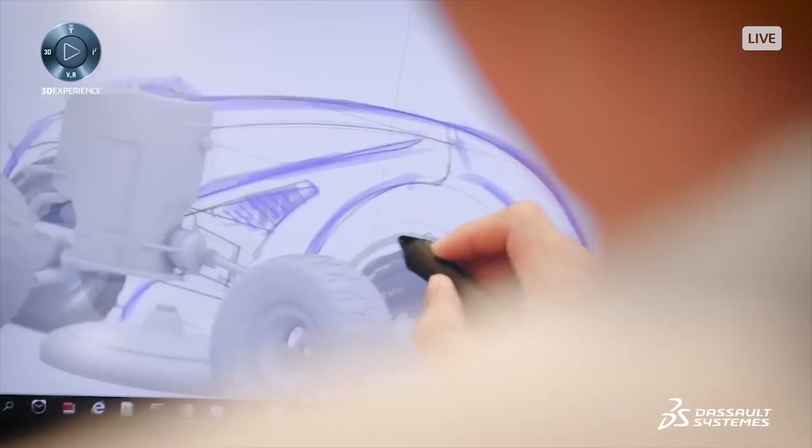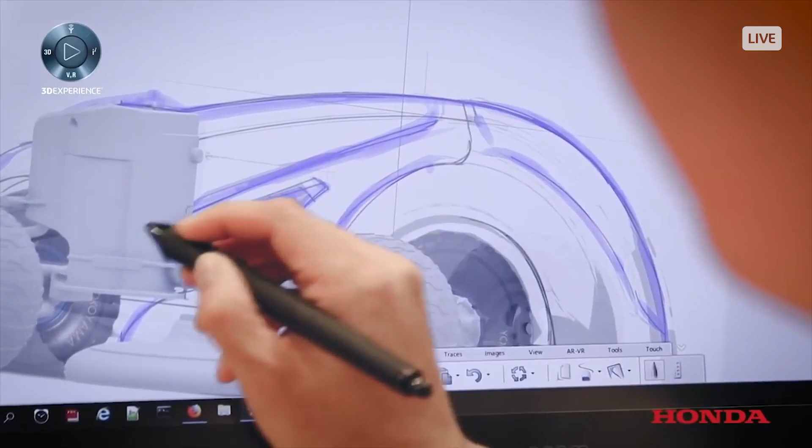It started as a design study to imagine a lawnmower of the future. Usually, I start drawing a two-dimensional sketch, and then I import it into CATIA using Sketch Tracer. If the shape is organic, I use Imagine and Shape and make it a solid with part design. That is my usual workflow. Modelers, designers, testers, and many others are able to collaborate on a common design through the use of the 3DEXPERIENCE. I think that is a major benefit of the platform.

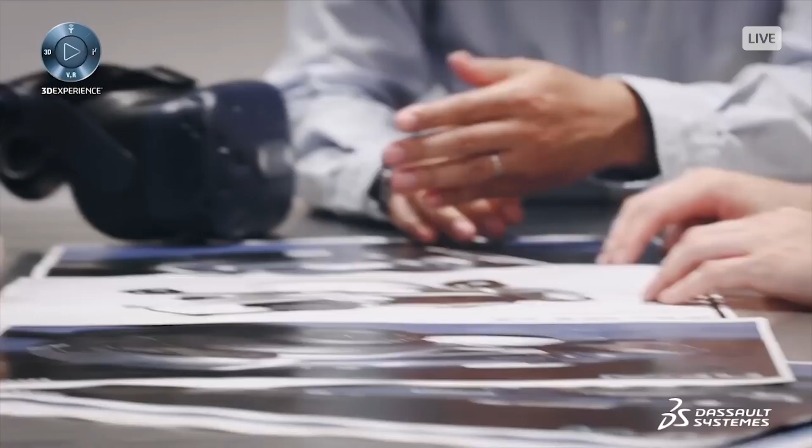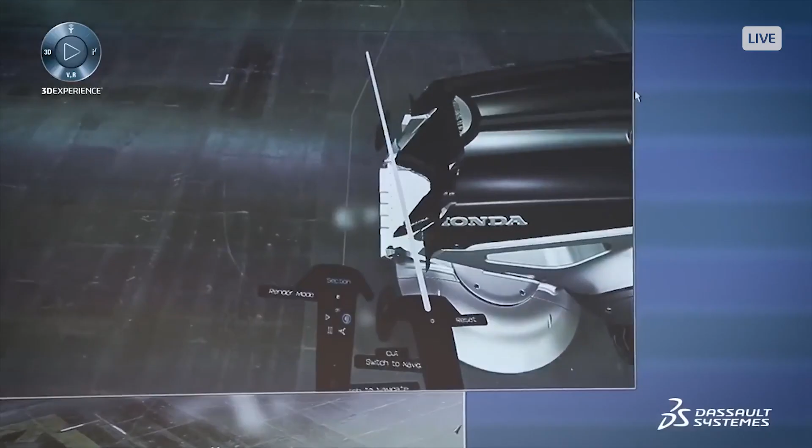By sharing a common 3D model, designers can express their diversity in design, whether it is a reflection of their distinctiveness experience or technical level. We can look at the same design using different perspectives, with a new personality or perspective added to it, and we can see the impact of changes to the design working on the same platform. I think that adds to a broader scope of design.

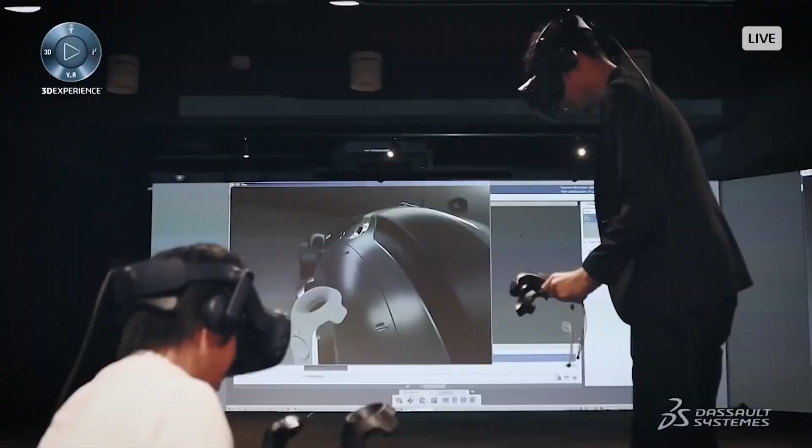As a digital modeler, it is my role to understand the design intent and what the designer wants to express through his sketch. I can check a model right away with a designer using virtual reality. Sometimes it's to check if everything will fit into the given space, or to check if the size is accurate. We may also ask engineers to join us to examine how easy it is to maintain the products, for example. The 3D Experience platform is very useful for us.

Impressive story, Martin. Yes. So can you tell us what's new in 19X then? Of course. So in our 19X portfolio, the biggest news that we're very proud of are, of course, the release of our two new roles. One is called the Visual Experience Content Collection, and the second new role is the Product Experience Presenter, which is a design decision role for collaborating in teams.

Okay. And then, of course, we see evolutions on the existing roles in our portfolio when we look at Visual Experience Designer with live rendering as the main app. Again, here we have focused on the three main pillars for improvements, which is user experience, which is new rendering features, rendering consistency across our render modes, and also increases in performance. Excellent. So let's see that in action in details.

Let's go. As mentioned before, the biggest news in our CATIA Design product experience portfolio for the 2019X release is the full general availability of our new roles, the Product Experience Presenter and the Visual Experience Content Collection.

With general availability, those two roles are now accessible like all other roles from Dassault Systèmes for the 3DEXPERIENCE platform. That includes full availability on-premise and on cloud, and they can also be ordered for evaluation. So let's have a look at what those two roles are about.

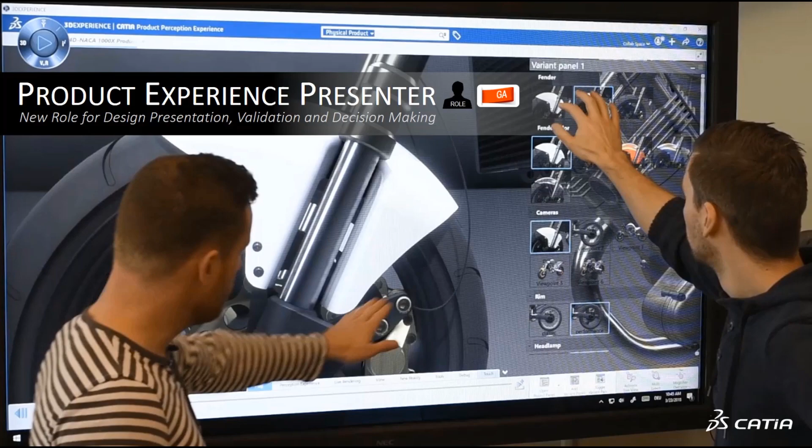The Product Experience Presenter is dedicated to easy and intuitive visual design reviews. The role, with its main application called Product Perception Experience, is targeting three main user groups: creative designers, who want to explore different design ideas and combine multiple selections of materials and shape options and see those in context or in side-by-side comparison. Then we serve design teams as a community who want to discuss the different ideas as a group inside their own team, as well as together with other teams and stakeholders, then capture the decisions and in this way prepare management reviews.

Finally, the third kind of user we target is a design manager. The manager wants to review and compare the proposals of the teams, but is not typically an expert user of one particular software, let alone of all the different tools which are used daily to create the inputs. He or she wants an accessible and intuitive way to understand a complex product or challenge quickly and then make informed and solid decisions.

Besides the availability, we have evolved the user experience of the role to provide smoother workflows. For example, it is now more intuitive to define packages of different variants for review. There's also a new way of interacting with the variants during a presentation. Besides the established user experience of clicking on one of the thumbnails to switch a variant, a user can now also set up triggers for interaction. The triggers will then switch a certain set of variants on activation directly on the 3D geometry.

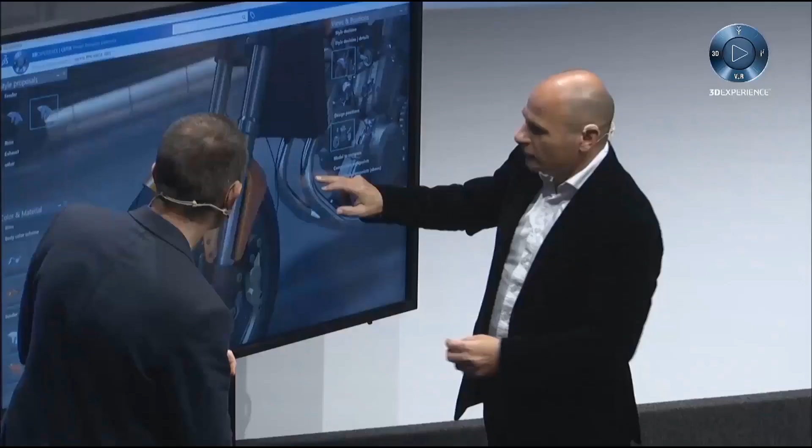If you can move to the next viewpoint, because even if this blue material looks nice for a sport version, we thought that it might be also nice to have another color for the body. I will also change it on the fender. So this orange is... You change it on the fender? Here? Oh, okay. Yes. And you did put a car paint, right? Yes, it's a car paint. All right. Looks good.

So, all right. If you are happy with this one, maybe you would like to compare it to the existing urban version? You wanted to do a design change also or not? No, it's okay. After that. Okay. So let's compare. So if you can open the model to compare, activate, yes. Hold on, it's coming, it's on its way.

So we are comparing here two motorbikes. We will compare the urban one. You see the previous urban version. Okay. You have the comparison viewpoint as well. Here? Yes, so if you can activate the first one, because what I did, I also created a turntable for both of them, and I will just activate the turntable right now. Okay. For you to have a look.

Yeah, to do some design comparison is very important. Designers, they like to express new ideas, but they always want to compare between two versions or from an existing product to another one. By the way, the turntables are always in real time, so I can navigate while I'm doing the turntable, right? Yes, yes. And we can also, again, change the design alternatives we just showed before, if you like.

Can you change the exhaust, or? So no, you wanted to change the front light? We can change the exhaust again and have a simple one. We can change again to have the same body color, and so on. But yes, Fabio, our designer, has been working on a new headlamp. Because you see, the headlamp is still the classic one, kind of retro look for the sport one. So Fabio has been working on a more sport kind of headlamp.

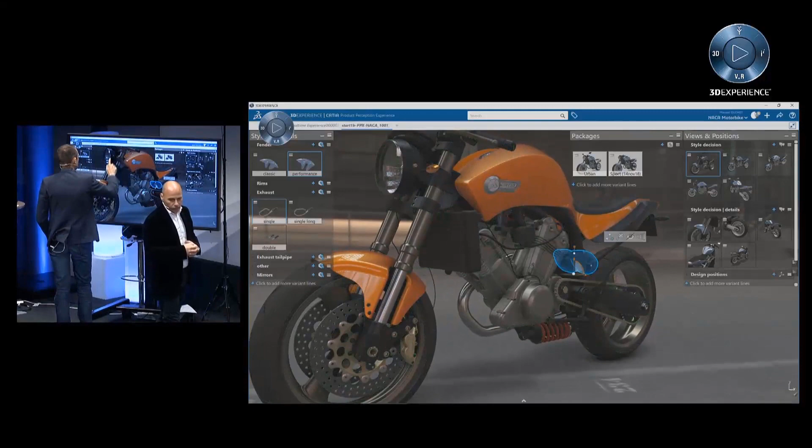Now he wants to add new lines or new variants, so he deactivated the play mode to go to authoring mode, and now it's loading new 3D elements, searching in the 3DEXPERIENCE platform for new 3D data. And then he will put them in position, or save them into a different variant thumbnail.

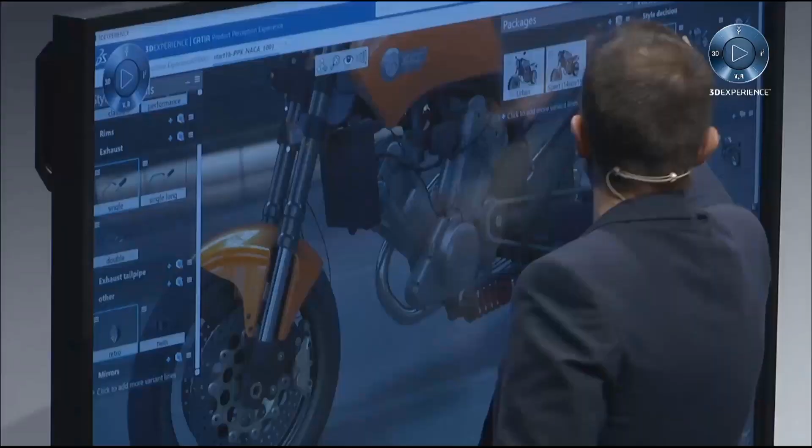So at the end, when we finished the presentation, we said, okay, let's see this motorbike, the sport version, with all these combinations of variants. So with this headlight, with this color, with this exhaust, and we can save that as a package. So by combining all the variants together, we create one package. So if we are happy with this version, you just push the plus button, and now it will create a kind of a shot, a variant. It's creating it, I think. Of all the combined variants.

Now we've seen how to use the product perception experience on a touchscreen. Let's see how the app fits into our VR experience roadmap. Building on top of the VR experiences, which we started to offer with the 2017x release, including collaborative review functions and different interaction modes in VR, we can now, with the 2019x release of the 3DEXPERIENCE platform, also use the product perception experience in VR with a head-mounted display like HTC Vive or Vive Pro.

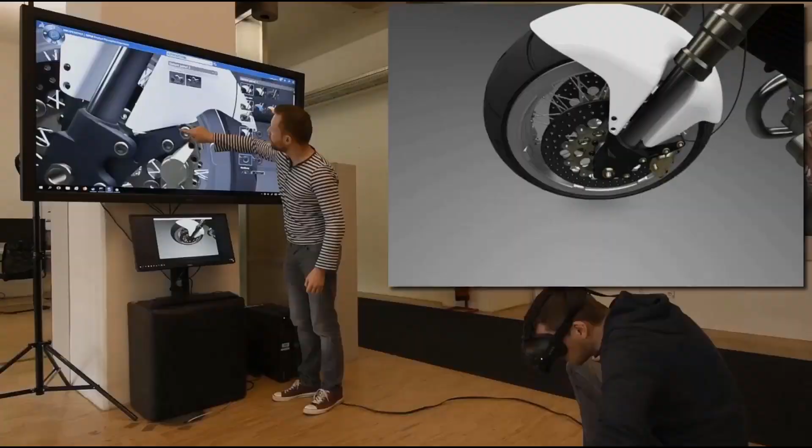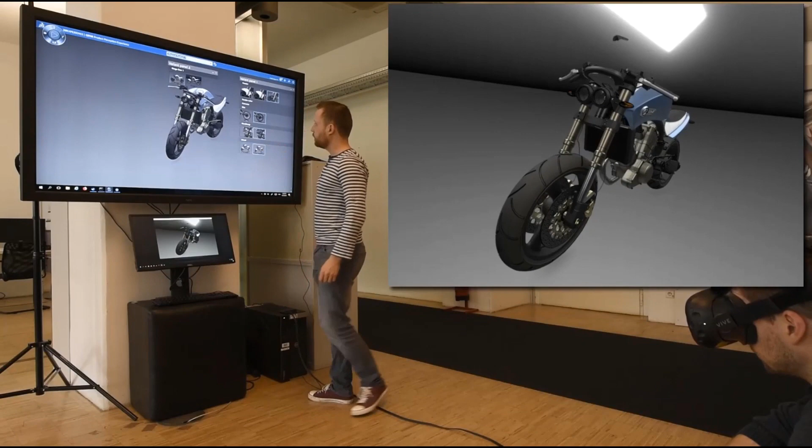We see here one possible combination of the capabilities as shown before. A review of features on a big touchscreen, including a session where one of the designers puts on a headset and can experience the data fully immersed in life-size stereo 3D. Any switches and animations triggered on the touchscreen are visible in real time to the VR user. Like this, a decision maker can fully focus on investigating the subject matter while he delegates variant switching to his colleague.

In combination with the new trigger functionality, since FD01 of the 2019X release, even the VR user has full control over the variant switching. Let's first check how to set up a trigger. In our example, I need to select an object in my 3D experience, and I define that object to become a trigger for a specific set of variants. As shown here, this can be, for instance, an open-close mechanism. Once I've set up the trigger, I can now, just by clicking directly on the object, activate the variant.

The trigger works exactly the same in VR. I point at my object, click with the controller, and the variant is activated. Of course, this works for all variant types in the application. In the previous example, we saw how to activate a door animation. Here, I point at my product with a pick ray, and by clicking on different parts, I can change their color and finish. This allows me full control over the appearance of my virtual design, while I move around it fully intuitively to explore different options from every angle.

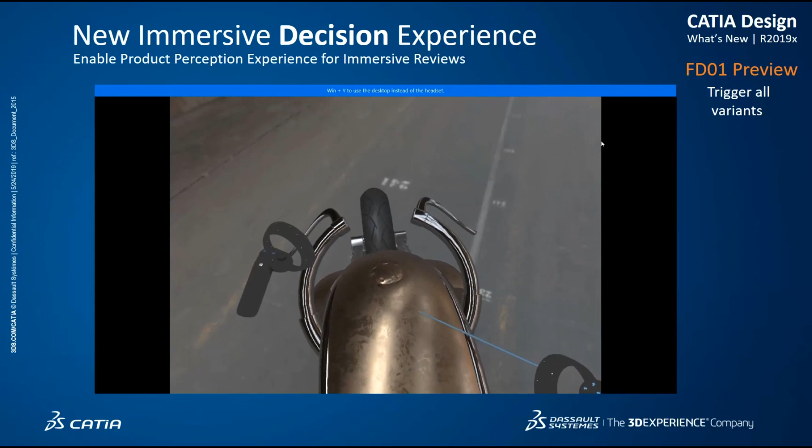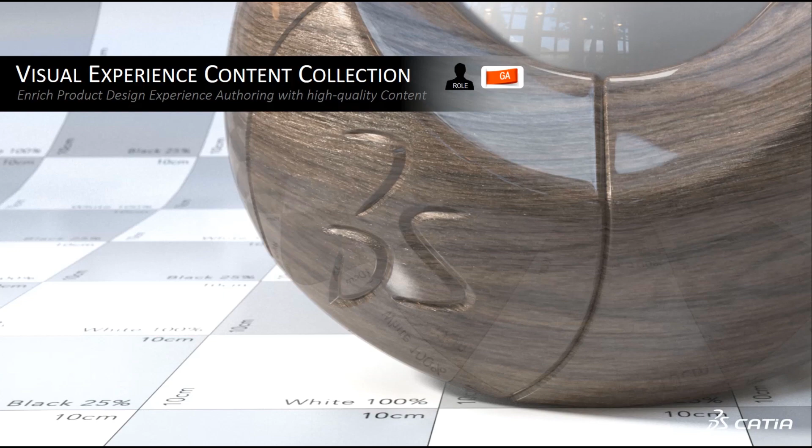Let's now look at the second new role in our product experience portfolio, which is called the Visual Experience Content Collection. This role is a selection of enabling content to accelerate your visualization workflows. Our goal is to make visualization easy and accessible for everyone, to allow to leverage the full capabilities of our integrated rendering technology. We aim to speed up the creative process and boost visual quality to the highest level.

The easiest way to illustrate what the role offers is in pictures. We see here a typical CATIA CAD model. With the Visual Experience Content Collection, without any expert knowledge on how to create textures or realistic materials, you can go from this view to this result in as little as 1 hour preparation time. Every bit of content which makes the motorcycle look that realistic was taken out of the box of our content collection and applied to the scene within 1 hour. From the realistic materials and textures up to the lighting and background in high-res HDR.

The Visual Experience Content Collection is available as an extension of our CATIA Design roles, which all feature CATIA Live Rendering. Those are in detail the concept building designer, creative designer, product industrial designer, transportation designer, visual experience designer, aero surface modeler, and Class A modeler. The contained items are designed to serve a multitude of industries such as automotive, aerospace, marine and offshore, high-tech, and so on. Every material and content item was chosen to maximize leverage for all those industries.

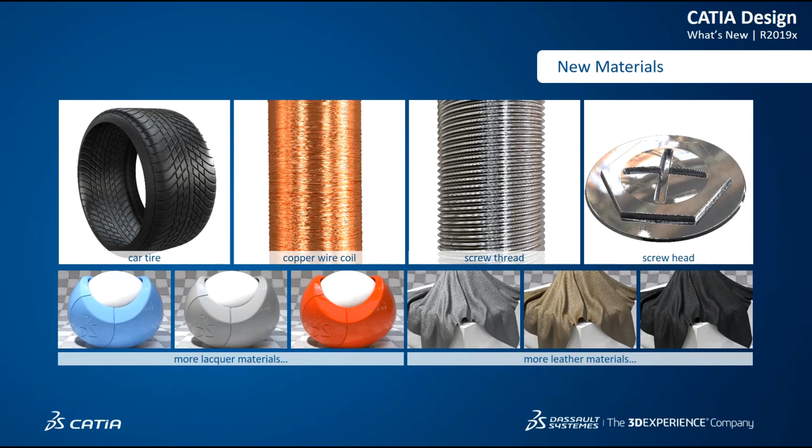Here we see a few examples of the resolution and detail of the materials provided with the content collection. All of those materials are procedural, which means they allow full user control over their appearance. You can adjust attributes like color, glossiness, grain, depth, or aging, just to name a few. For quick ideation in design and engineering, the procedural materials also contain examples like different patterns of car tires, wire, or screw thread.

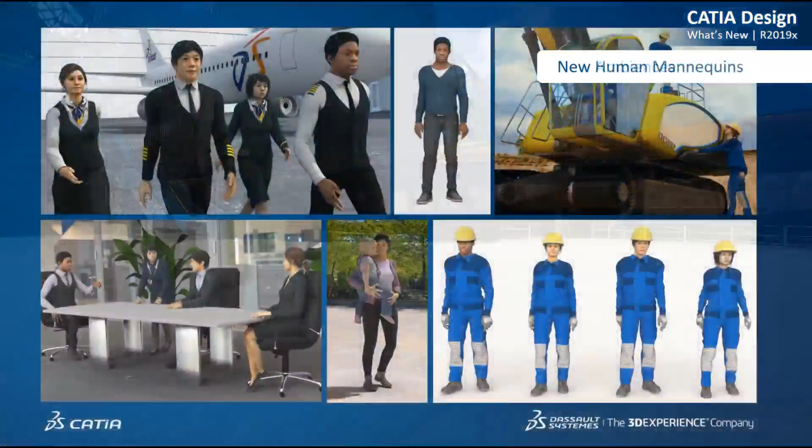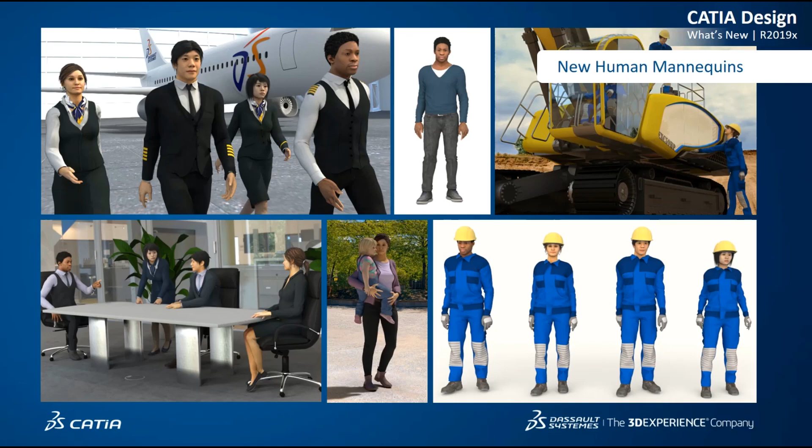The ambiances cover a wide range of scenarios like retail, nature, construction, indoor, outdoor, day and night. Each one comes with high dynamic range lighting and in very high resolution. Our human mannequins now come in different outfits to fit multiple industries and scenarios. They can be dressed up as businessmen and women, flight crews, or construction workers. On top of the different work outfits, various pieces of clothing can be switched in color and appearance. Whenever a more abstract representation of human proportions is desired, the mannequins can also be loaded with plain materials in different versions.

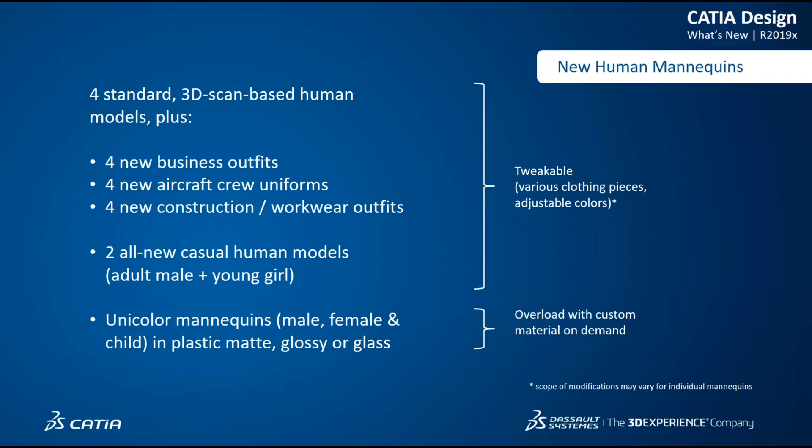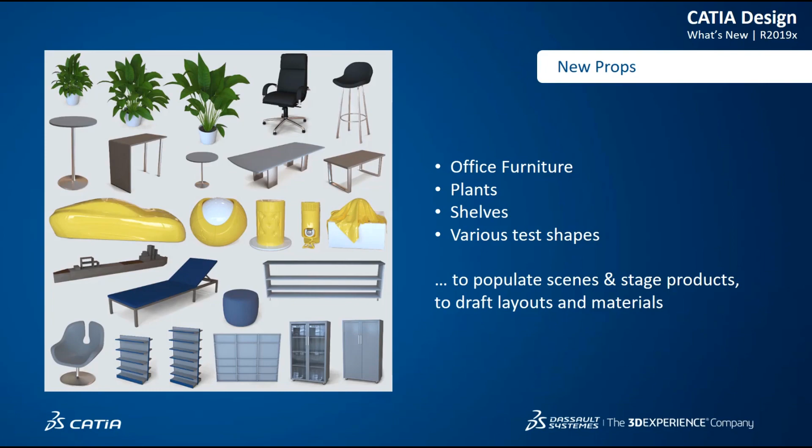The props are intended to give context and relative sizes and proportions, as well as to help illustrate layouts and user scenarios. They can be used like any other 3D object inside the 3DEXPERIENCE applications. So much for the brand new roles. Let's now look at the updates in the existing ones.

We start with the Visual Experience Designer and CATIA Live Rendering. With the 2019x release, we have migrated our rendering to a new material model which is called Enterprise PBR. For our global illumination rendering with Stellar and Iray, we now offer a denoiser. It's based on artificial intelligence and helps accelerate your render results drastically.

For better user experience, we have improved the workflows for creating and applying materials, editing UVs, and lighting. The camera model was reworked, and other new graphic features have been added as well. Diving deeper into the first of the 3 big initiatives on CATIA Live Rendering, which is visual excellence.

The previously mentioned Enterprise PBR is based on existing GGX BRDF models. The main goal during its development was to hit the sweet spot between expressiveness and performance, as well as offer visual consistency throughout the different render modes which we offer on the 3D Experience platform. It's been designed to act as the backbone of all our rendering and to consume all sorts of inputs, such as measured, scripted, or procedural materials.

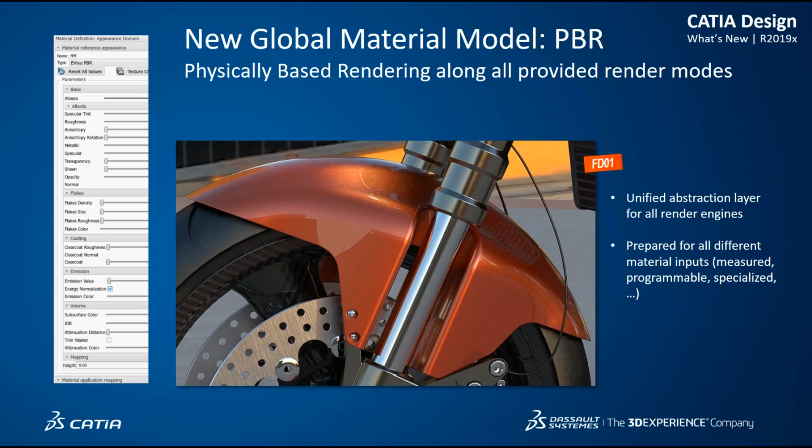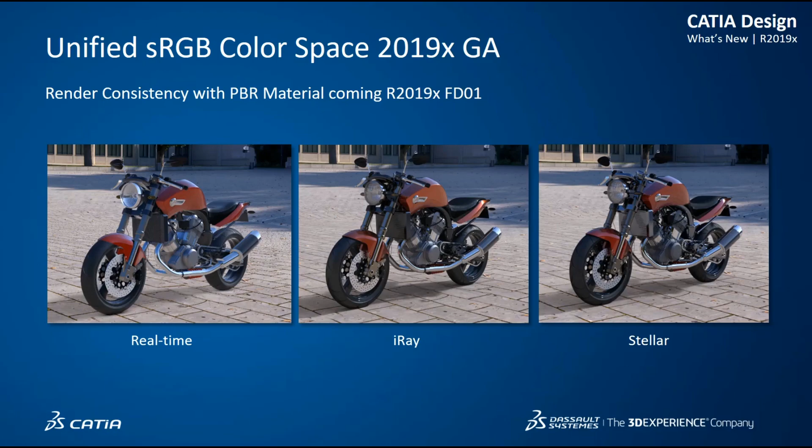The Enterprise PBR material is a render-agnostic material model which can be integrated into any rendering engine, and it's also documented and published as open source on GitHub. Together with a consistent material description, the complete render pipeline on the 3D Experience has been unified on the sRGB color space to consistently process inputs and outputs.

Also new is the handling of colors in accordance with international paint and coating standards. No matter what information on a color you might have, be it the CMYK representation, sRGB, a hex value, or RAL number, your color inputs will always be displayed and rendered consistently and accurately. The second big initiative on CATIA Live Rendering targets performance.

At the time of the release of the 3D Experience Platform 2019x, the latest hardware generation from NVIDIA, GV100, had been implemented. Development on RTX support has carried on in the meantime, and today we see an even bigger performance gain by the use of NVIDIA's latest RTX hardware. Independently of the GPU hardware used, we have also accelerated the real-time reactivity while working with the 3D Experience by optimizing memory usage and using instancing for materials.

The ray tracing with Stellar initializes much faster than before, and we have implemented a mixed rendering mode which falls back into real-time visualization whenever the user interacts with the scene, and continues to render in global illumination as soon as the scene is resting again. The artificial intelligence-based denoising technology allows much faster convergence of the final image.

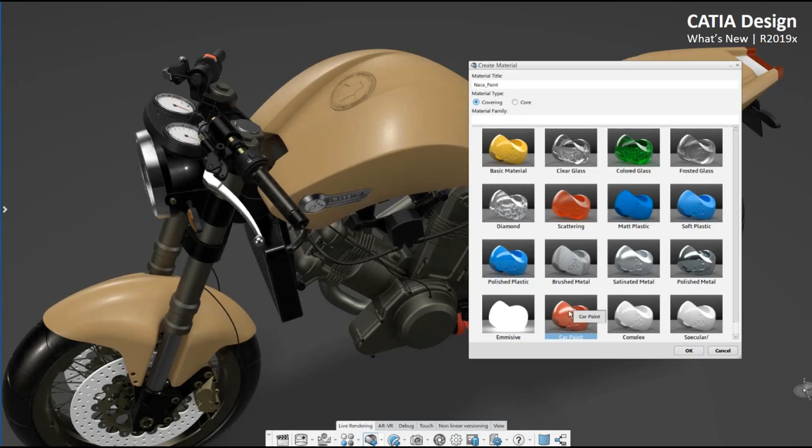Last but not least, we have improved several workflows for our users in CATIA Live Rendering. With R2019x, we're introducing a new command for creating visual materials, as seen here in the panel. To illustrate it in a video, it's very simple to start the creation. The new panel suggests template materials sorted in categories.

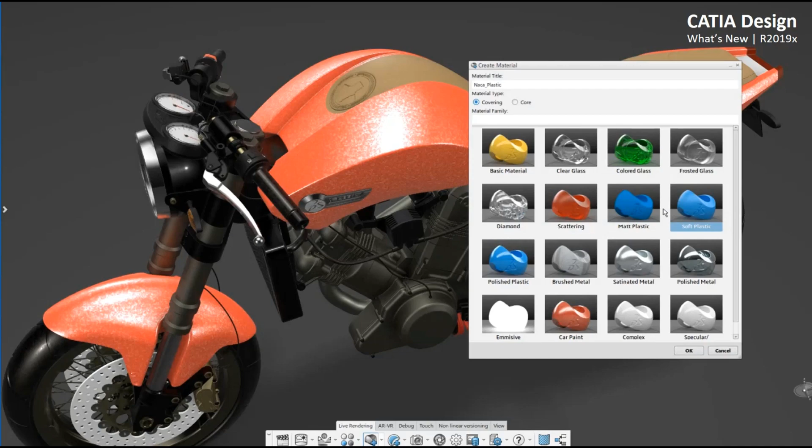The user can enter a name, select one of the templates, and immediately start applying it to the geometry. This makes the new user experience much more visual, user-friendly, and accessible. Once created, the materials can of course be changed and tweaked as usual. To find an existing material much more efficiently, the old material search browser has been replaced by a new material palette. The new palette offers sorting and filtering by multiple criteria such as material type, author, or even by keywords.

To apply materials consistently to your model, CATIA Live Rendering now offers a new command for UV unwrapping. The command itself is reused from the Generative Shape Development application and becomes accessible in Live Rendering if you have one of the following roles installed: Transportation Designer, Product Industrial Designer, or Class A Modeler.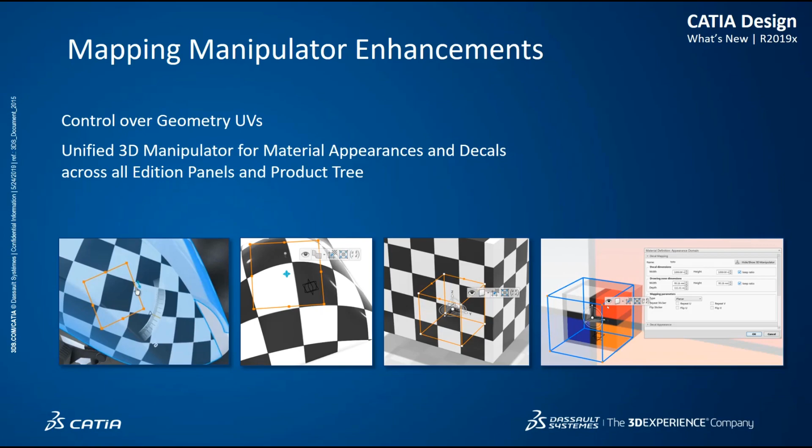When working with ambiances to add lighting and context to your product, the user experience has been unified between the different data types of ambiances. Tooltips and new panels provide further guidance on the new features.

That concludes the highlights on the visualization solutions in our portfolio. Now let's have a closer look at what's new in our immersive VR solutions.

As a quick recap, we have a roadmap for our portfolio to integrate our offerings and offer the most value of our combined functions and visual quality. We will now have a closer look at new functionalities in the immersive visual experience and the immersive collaboration experience. We start with immersive visual experience, which is our enabler role for single-user VR experiences on the 3D Experience platform.

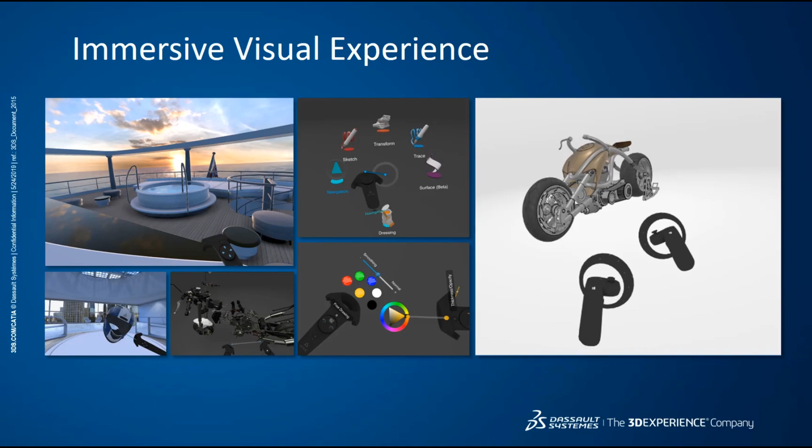For context, let's look at the latest evolutions of the role on R2018x. With hotfix 4 on R2018x, we introduced new interaction methods like sectioning and measuring into the 3D Play app in VR. With hotfix 5, those were then migrated to become natively available inside the immersive visual experience, and with that, in all applications throughout the 3D experience that support VR.

With the R2019x release, we extend the provided commands even further. The user now has the capability to play animations while immersed, switch transparency for individual selected parts, as well as cycle through the global render modes to display the product either with fully realistic appearance or without materials, or only as an outline and so on.

The display of measurements done in VR has been changed to be more convenient to the user. Summing up, this means that with Immersive Visual Experience, you now natively have all those review functions available whenever you use VR inside any 3D experience application.

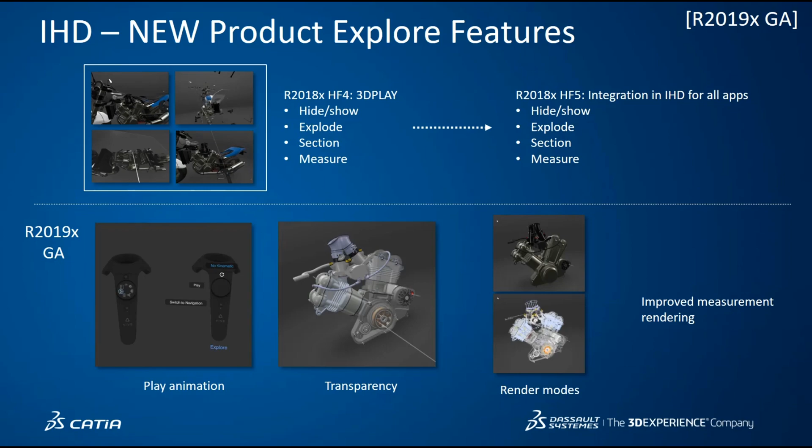Another evolution on 2019X is the support of a wider range of VR headsets. Besides HTC Vive and Vive Pro, the 3D experience now supports the Windows MR devices. Those devices are available from different vendors who share a common partner platform as a standard.

One advantage of those devices is that they don't require any external tracking base station, but they have the tracking integrated into the headset. The installation for the Windows MR devices is a bit more complicated, as they require a specific Windows feature to be installed by the user. They do also require a certain Windows 10 installation and eventually a third-party Bluetooth device to communicate with your workstation.

The access and licensing for the user on the 3D experience is exactly the same as for the HTC Vive products, which means the devices work with the standard Immersive Visual Experience role and use the same basic controls and applications. Some topics require further evolution over the next FDs.

Currently, the Product Explore mode, Natural Sketch VR, and the Human Passive Incarnation are not supported by the Windows MR devices. Those functions will be addressed with our next VR UX initiative.

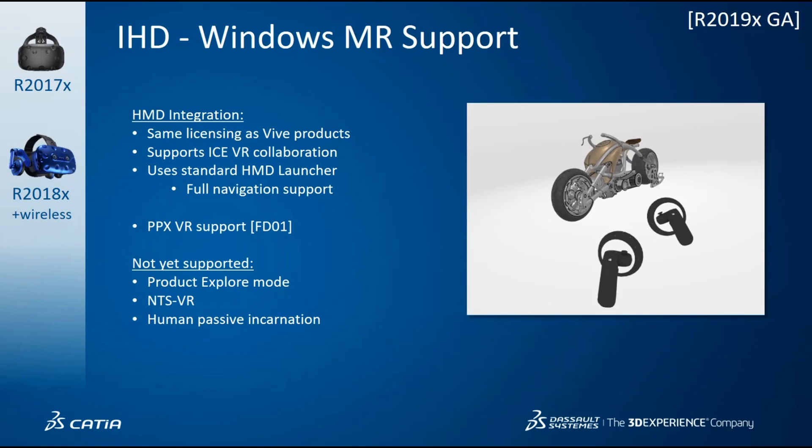Some convenience upgrades include better placement and usage of the HMD mirror on the user screen. The mirrored view now always opens centered on the display and can also be resized, which helps improve demonstration scenarios with bigger audiences. The natural ambiances have been enriched with a new one for large-scale products, which is a hangar environment.

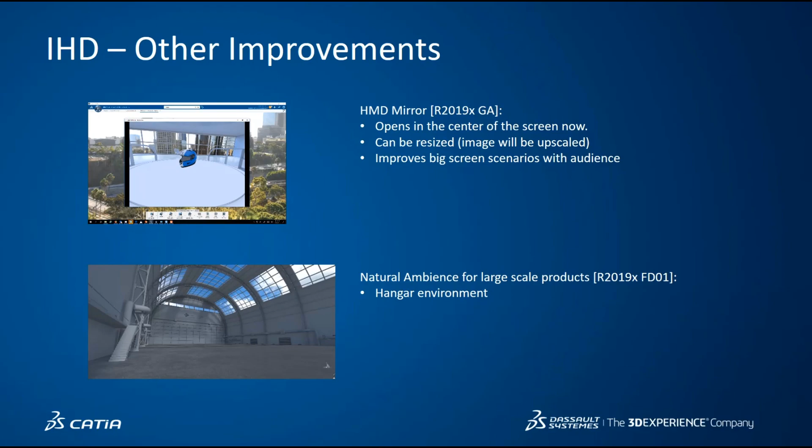We are working on a new unified VR UX framework, which the first applications are making use of already. We see in 2019X the application Natural Sketch VR with all the controls around sketching and drawing in VR. The purpose of the framework is to offer consistent and easy-to-use building blocks to create future VR interactions for all applications on the 3D experience.

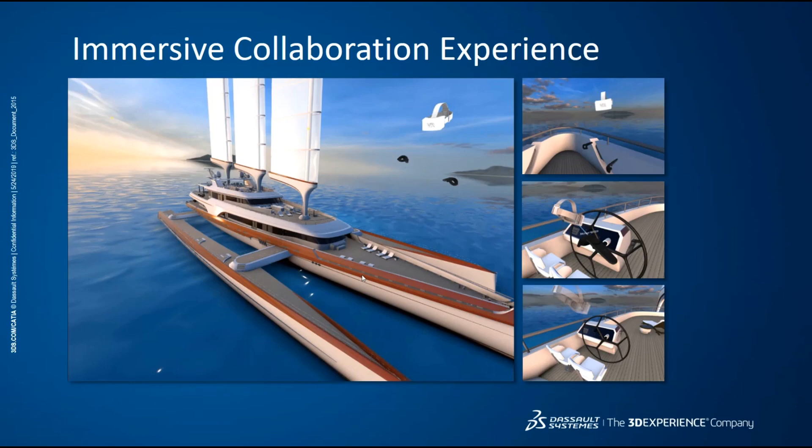For users who want to interact in collaborative VR reviews on the 3D experience, we offer the Immersive Collaboration Experience role. For recap, here we see the functions offered with the role since 2018X.

The user can navigate in 3D in different modes. He or she sees a virtual representation of other users in the session with their name or user ID. There's a ghosting function whenever you get too close to another user, so his virtual representation doesn't block your own view.

Users can apply a go-to command to jump to another user's point of view. Products can be placed on an animated turntable, which is synced for all the users in the session. And products can be grabbed or moved, which is also synced between all users.

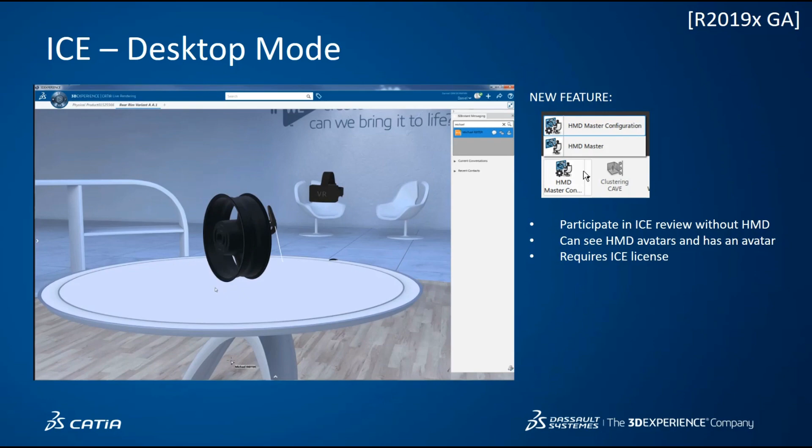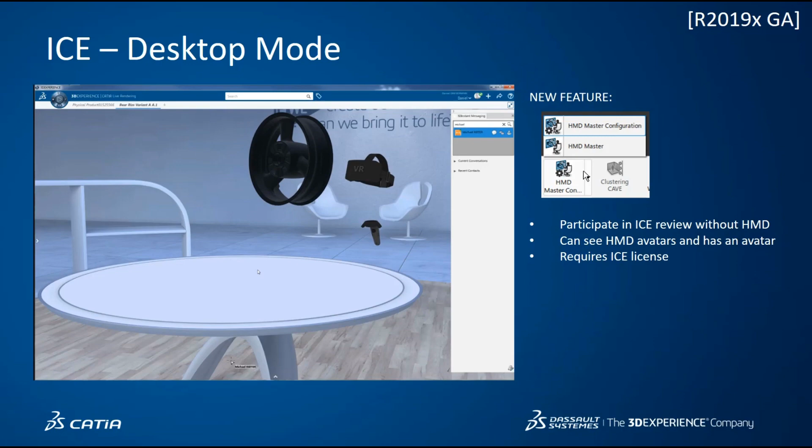As a new feature in 2019X, the Immersive Collaboration Experience now offers a desktop mode. This mode allows VR users and non-VR users to participate in a joint session. All users are able to see each other and interact with each other. This enables a desktop user to stay in his or her common workspace with all controls they're used to.

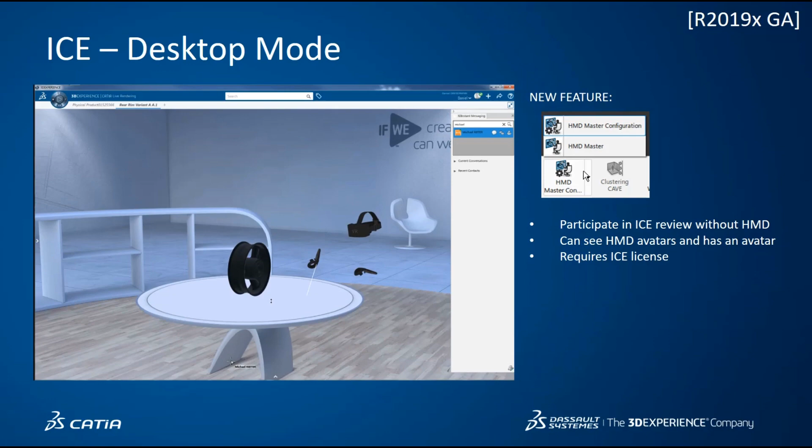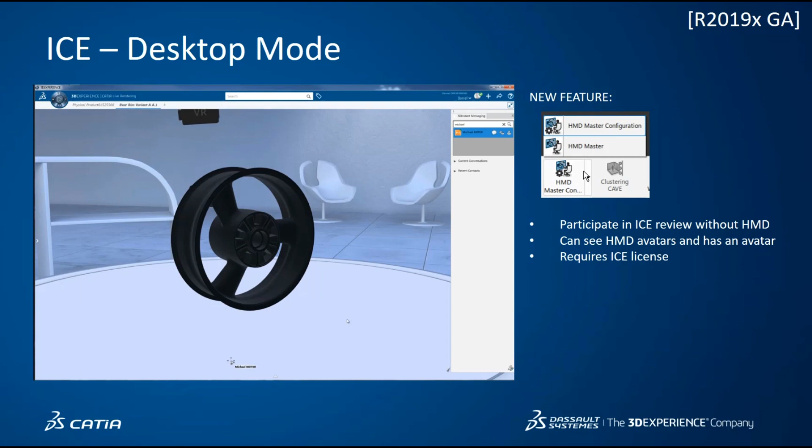And they can, for example, model something live with other participants inside the collaborative session for review. This allows the integration of the different paradigms of creation and review which we have on the 3DEXPERIENCE and truly enables collaboration across local boundaries.